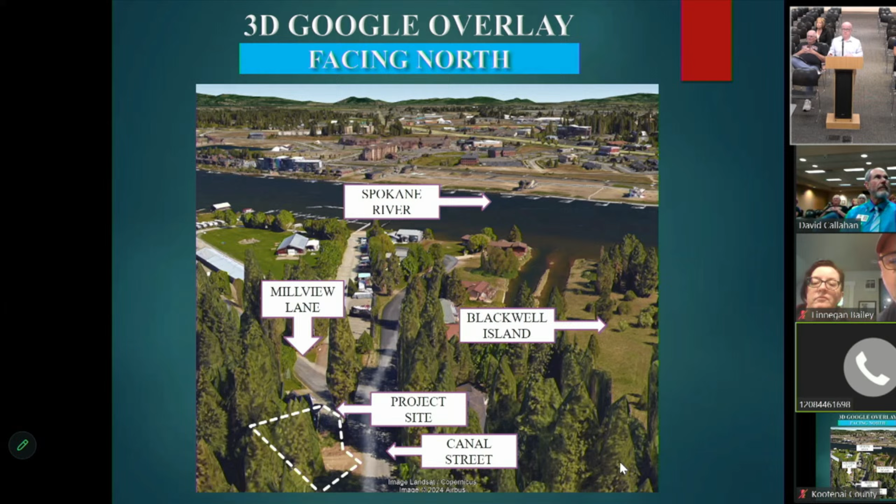The site has an existing booster station. It's quite old, based on my conversation with Kyle Marine, who is the Water Department director. He advised me that based on his research, the old booster station has been on that site since the 70s, when the city acquired the water system, and it has been in disrepair and needs to be replaced based on its current condition and inability to provide adequate flow rate for the city residents.

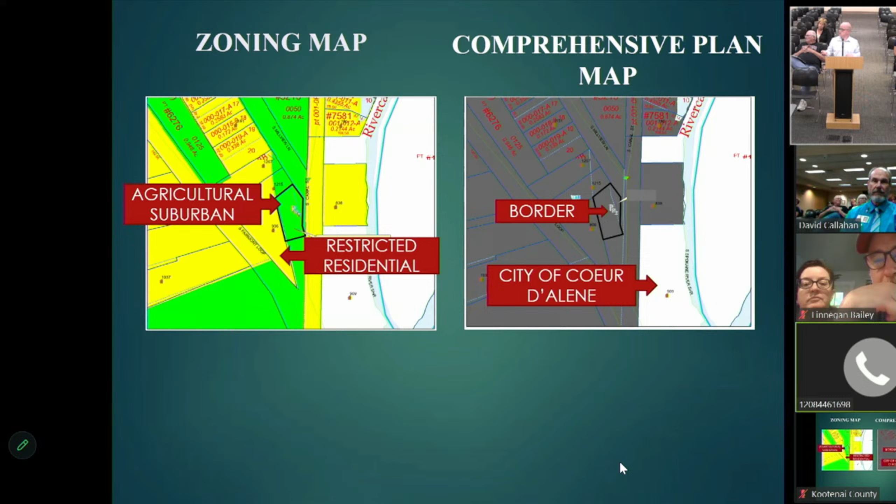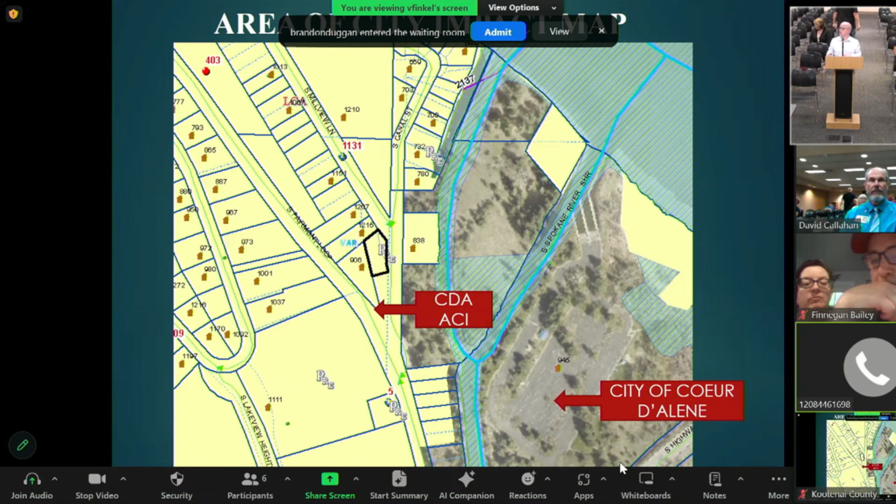As I stated, the current zoning is agricultural suburban, and pursuant to our Land Use and Development Code, a public utility complex facility can be approved through a conditional use permit process. The comp plan designation is border. You have city limits just to the east of the subject property. The property is located within the City of Coeur d'Alene area of city impact, and during the agency comment period we felt it was not necessary to solicit comments from the city, since the city is requesting this.

As you can see, the property is fairly narrow—approximately 65 to 70 feet wide—and has an irregular shape along the front property line. According to our land use and development code, the minimum setback for all other structures that are not residential in nature or accessory to a residential structure or use shall have a minimum of a 30-foot rear and front yard setback. So the applicant, the city, had asked whether they could pursue a variance as part of the conditional use permit process to allow them to encroach into the front and rear yard setback.

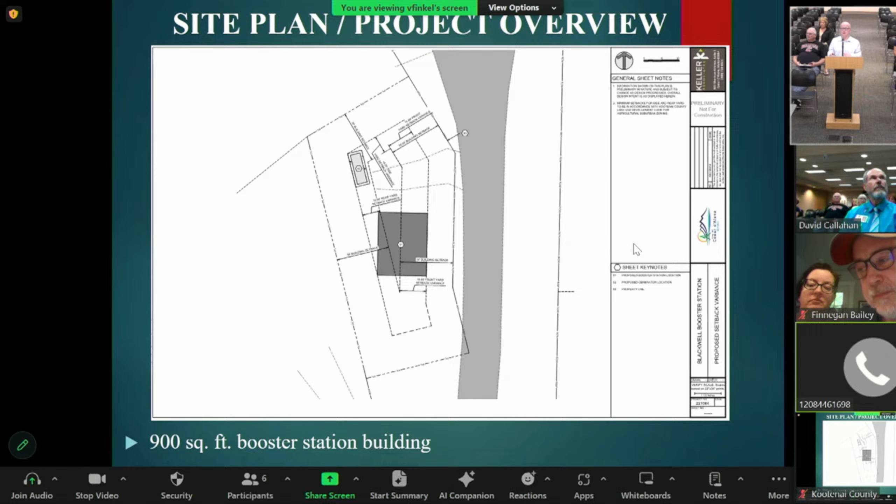Based on our code provisions, the applicant may request a deviation from the setback requirements as part of the conditional use permit process, as long as they meet the conclusions of law set forth for the variance requirements, along with the conditional use permit requirements. So the new facility will consist of approximately a 900 square foot booster station building. There will also be a standby generator, and then there will be a fence around the project area based on the Homeland Security requirements.

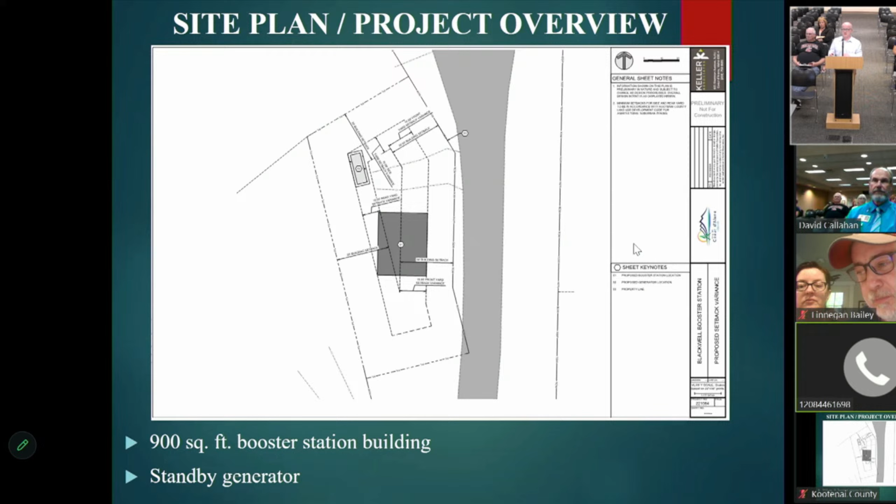So the applicants are proposing to have the front of the booster station building 15 feet from the front property line, as well as 20 feet from the rear property line, and they're requesting a 15-foot variance from the front yard and a 10-foot variance from the rear. There was also mention within the narrative that they're seeking a variance to the side yard setback to place this generator on site.

Based on our communication with our building official, we determined that a standby generator is not a permanent structure, it's a structure that can be moved. Moreover, it's considered to be equipment rather than a structure based on building code. Therefore, it does not require a setback variance and can be placed in the proposed location as shown on the site plan.

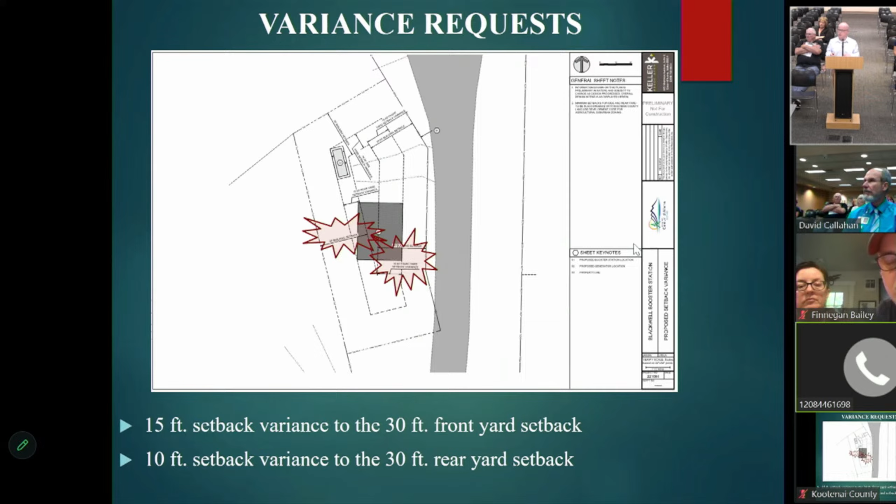We asked the Water District Director to give us photos of some similar structures in the area so that we have a better understanding, and as well as the public, to know and understand what the future structure would look like. This is one of the photos, and I believe we got another one, but this is a building that would likely be constructed on the subject property with a generator on site as well.

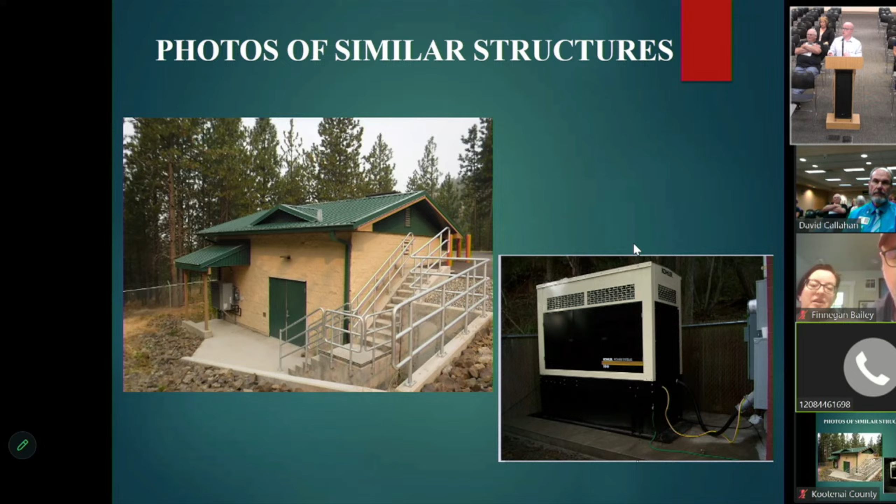During the agency comment period, we solicited comments from all the agencies with jurisdiction. One of the concerns raised by the Post Falls Highway District is they were not sure where the location of the right-of-way line is in relation to the existing property lines. The applicant did submit a revised site plan that provided a little bit more detail to show or depict the location of the property lines as well as the structure.

And the highway district official requested that at the time of site disturbance permit application, not building permit application, that they receive a sealed and signed site plan from their surveying and engineering company.

I'd like to add that this structure does not require a building permit because according to building code, any structures related to municipal infrastructure do not require a building permit, and that's strictly out of the building code. Every other agency was in support of this, and there appears to be no issue with those agencies.

During the public comment period, there were a total of 4 comments. One was in opposition, one was neutral, and two comments were received from, I believe, a couple that raised concerns with the proposed improvements and whether or not some of the existing vegetation on site would be removed to expose the new structure and potentially impact the adjoining property.

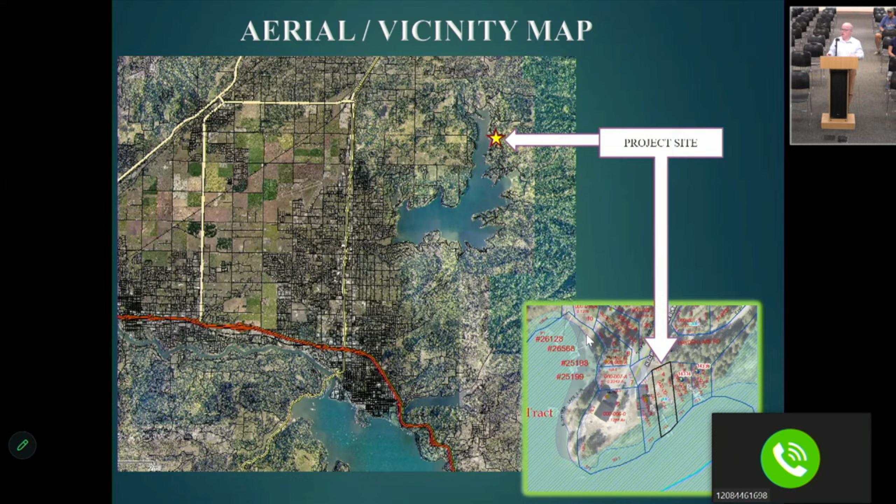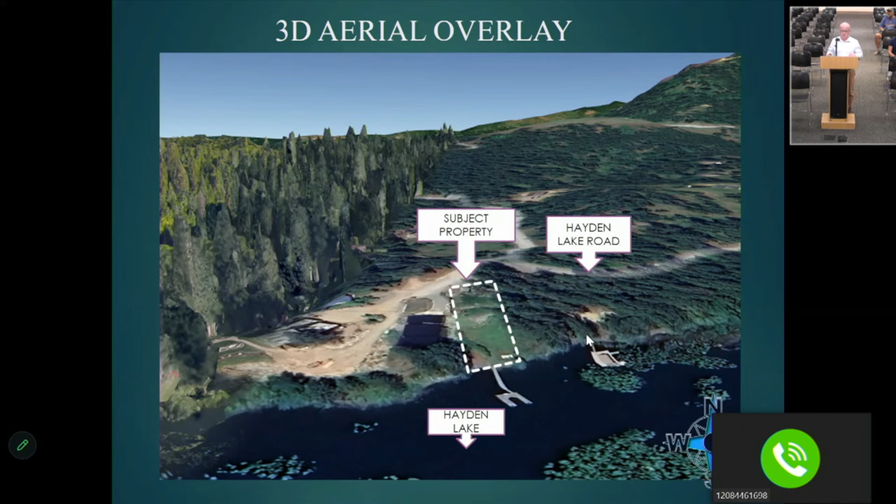The subject property is located on the east side of Hayden Lake. The property is zoned restricted residential and is approximately a third of an acre in size. As you can see, based on this Google 3D aerial overlay map, the property does have some steep slopes towards the lake. There's an existing cabin on the property, which currently does not meet the setback requirement.

The requested variances are in order to be able to expand the existing footprint of the non-conforming structure. As you can see, the minimum setback requirements in the restricted residential zone are 25 feet from the front, 10 on the side, and 25 on the rear.

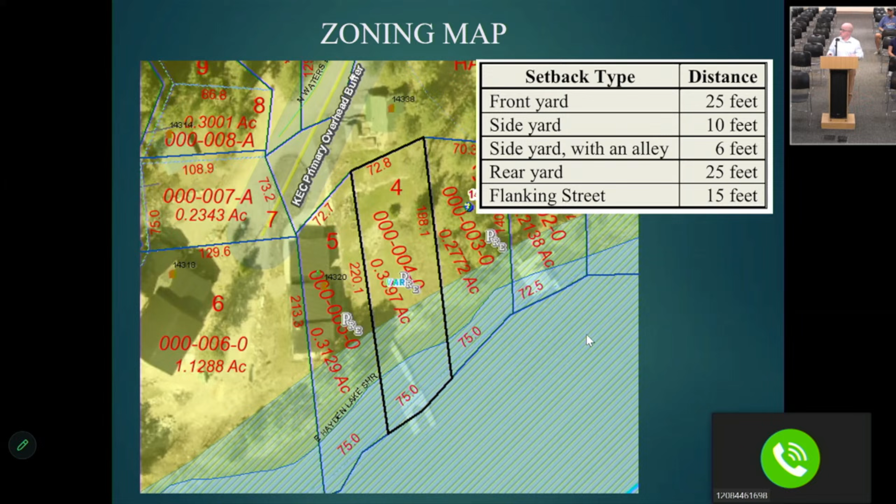These are some of the photos of the existing cabin on the property. This is the front of the residence. This is the side where the structure is within 4 feet of the property line. The front of the cabin is right on the property line, so this shed that Mr. Nash currently owns is encroaching into the Water's Edge Court private right-of-way.

This is the rear of the property where the applicant is proposing to expand their building. Further down, there's the location of the existing septic system on the property. This is the view of the cabin from the rear, as you're looking from the lake.

So these are the existing conditions of the property here. There's the overall site plan, and this is the close-up detail of the existing cabin. As I stated, it's right on the property line on the front and 4 feet on the side. The intent of the applicant is to be able to renovate the existing portion of the cabin as well as expand on the rear.

They would retain the same plane and extend the new expansion area 4 feet from the east property line, and they would not be building any closer than the structure already is, but they do want to expand on the west side and be 9 feet 2 inches from the west property line.

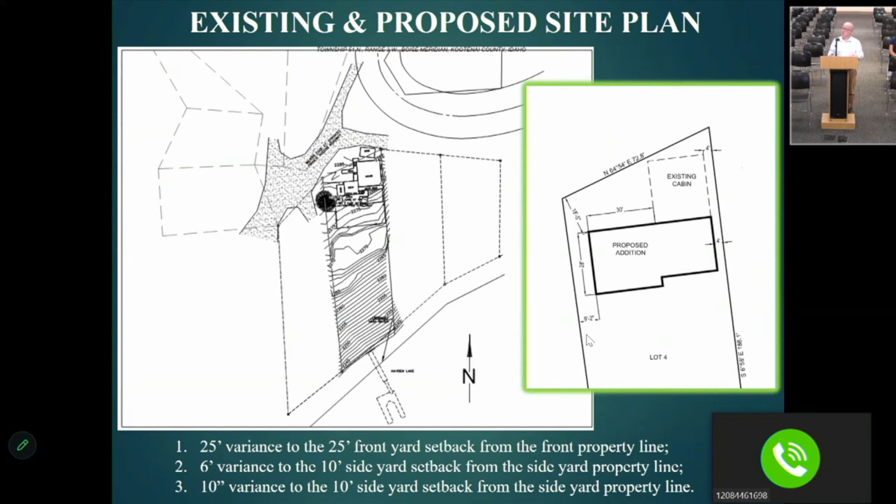What's the size of the addition? We'll have a time for public comment.

During the public agency comment period, we went through our standard protocol of soliciting comments from all the agencies. No one had any issue.

The only unique situation in this case is that the applicant has applied for an incinerator toilet rather than expansion of the existing drain field on the property to accommodate any additional bedrooms constructed within the structure, because the sizing of the drain field is based on the number of sleeping areas versus bathrooms. So they requested an incinerator toilet. I have not had the discussion with the owner about the intent of the drain field. However, it's further downhill, and I don't know if it has any relevance, but just wanted to give you a heads up that this is somewhat unique.

During the public comment period, we did not receive any comments in opposition of this request. I did a site visit and spoke with the adjoining neighbor who raised some concerns. He's here tonight and he'll have an opportunity to speak before you. We did find that the narrowness and the steepness of the property does lend itself to undue hardship, and that the expansion, based on the current location of the cabin, makes it difficult to expand the structure elsewhere on site.

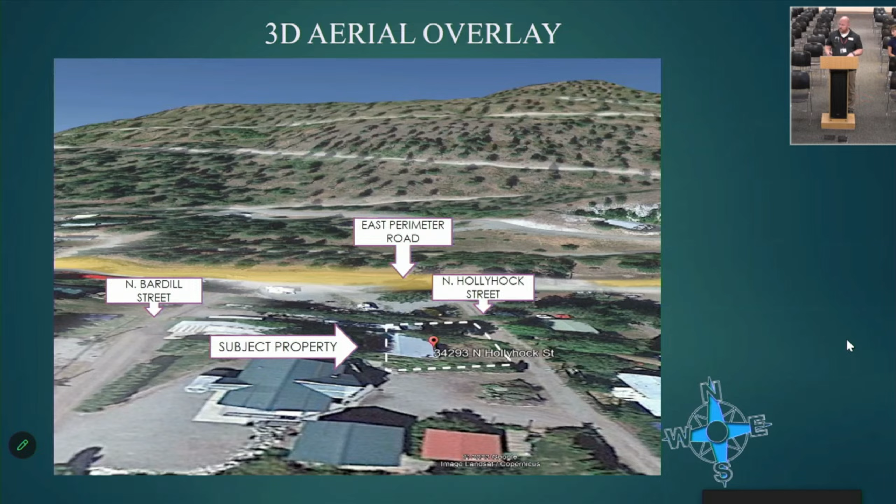If I can get it to work. Okay, the subject property is located in the unincorporated geographical area of Bayview, as indicated on this screen. More specifically, the subject property is located between North Hollyhock Street and North Bardill Street, both of which are private roads within the jurisdiction of Timberlake Fire. Furthermore, the subject property is located south of East Perimeter Road, a public road in the jurisdiction of Lakes Highway District.

As mentioned previously in other hearing tonight, the setbacks for the restricted residential zone are as such: front yard being 25 feet, side yard 10 feet, rear yard also 25 feet. The subject property, highlighted in red on the screen, is approximately 3,005 square feet, or 0.069 acres in size. The minimum lot size in the restricted residential zone is 8,250 square feet, or roughly 0.189 acres.

Article 2.4, subsection 8.2.404.A of the restricted residential zone states that parcels created prior to January 3rd, 1973, which are less than 8,250 square feet in size, shall be regarded as conforming parcels for purposes of this title. Through staff research through the project, staff discovered that according to assessor records, a manufactured home had been issued a building permit and placed on the parcel in 1971.

It was placed approximately - I'm going to go to the next slide. So as you can see here, the manufactured home was placed approximately 5 feet from the south-facing property line, which is the bottom. I'm not really sure how to use the pointer. Oh, right there. 5 feet from the south property line, 3 feet from the rear property line, and 2 feet from the north-facing property line.

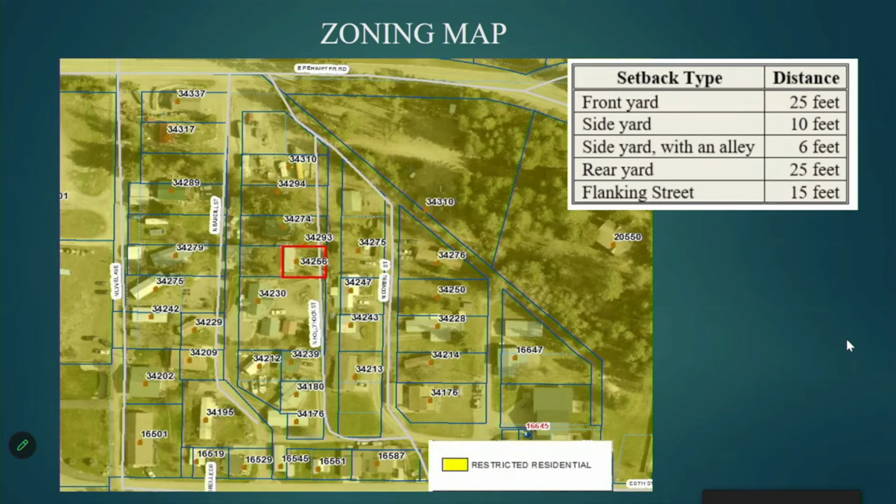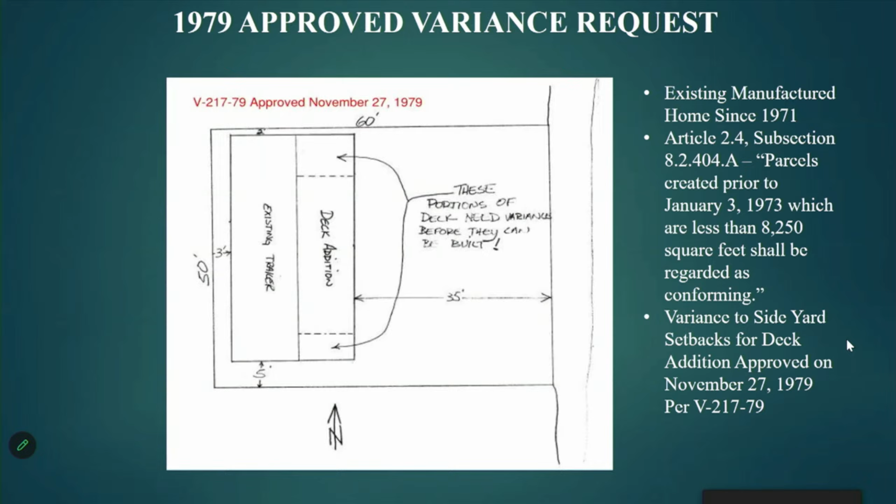On November 27, 1979, the then homeowner of the parcel received approval for a variance request to build a deck addition that you see here, that would essentially develop a larger footprint and would encroach on the side yard setbacks to the same extent as the existing manufactured home. That was approved in 1979. Site photos that the applicant provided, as well as what staff provided for a site visit.

As you can see by these images, the site has been cleared per Resolution 230941. As of December 18th, 2023, the existing manufactured home and the deck addition were both demolished, and the building division verified that the demolition had occurred according to plan.

So the variance from 1979 is kind of a moot point, except for the fact that the deck had been approved for existing encroachment within the setbacks to the same extent. The photographs also depict the narrowness of the site. As you can imagine, at 0.069 acres it's a very small lot. In the bottom right, you can see an example of what a future dwelling may look like. This is just a proposal at this point.

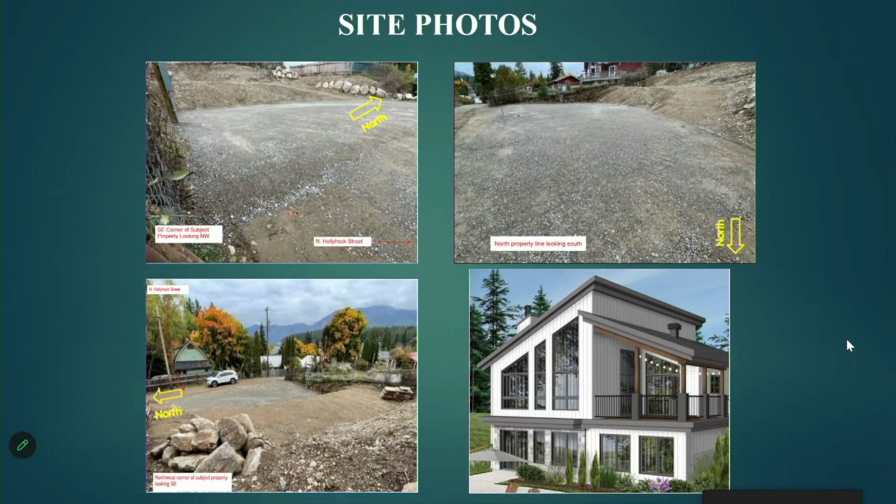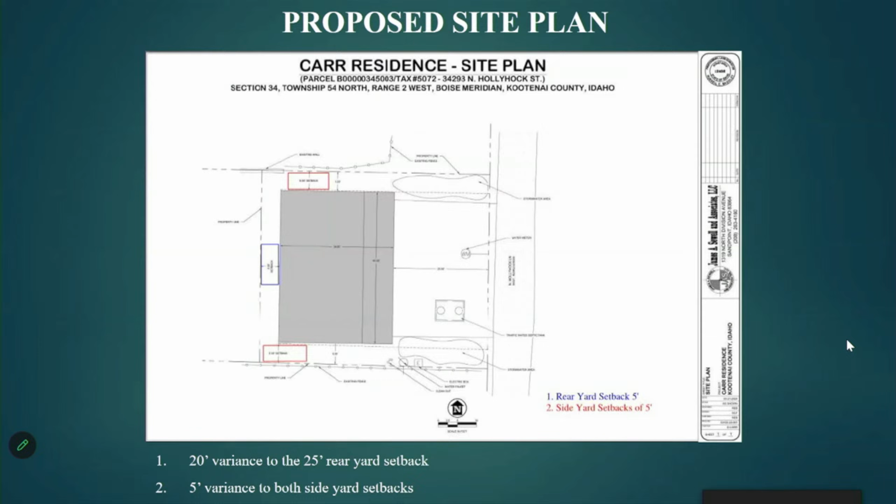Staff requested comments from all agencies with jurisdiction. It is understood that no concerns were raised by any of the agencies with jurisdiction. However, it is important to note that at time of development, the applicant will be required to comply with the requirements of both the building department and the fire district with jurisdiction.

Public comments: there were 7 public comments in opposition. Mainly the concerns were raised with regard to a lack of privacy and a potential to create a fire hazard.

Through staff analysis for our review of the project, many of the surrounding parcels in the area were created prior to the establishment of the minimum lot size setbacks, which created essentially a small lot size. Staff finds the development of a single-family dwelling is consistent with the pattern of development in the area. An undue hardship exists because of the natural characteristics of the site, the small lot size, the narrowness of the site. The hardship is not self-imposed, as the parcel was created prior to 1973.

Limited space for development. Request is not in conflict with the public interest, and staff determined that developing the parcel with a single-family dwelling is compatible with the existing neighborhood and development pattern within the area. That's all staff has at this time, and I stand for any questions.